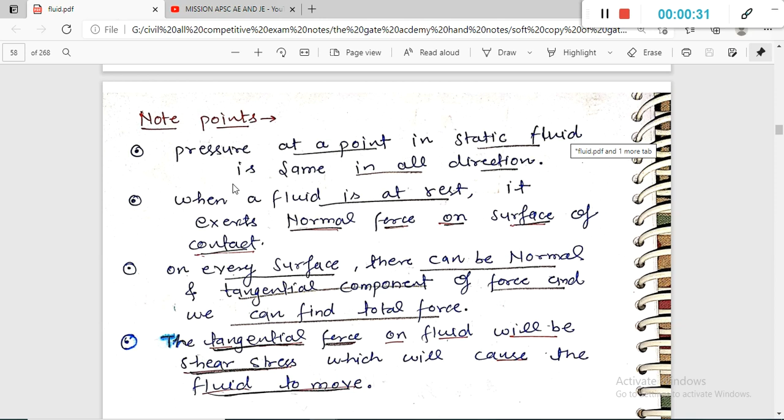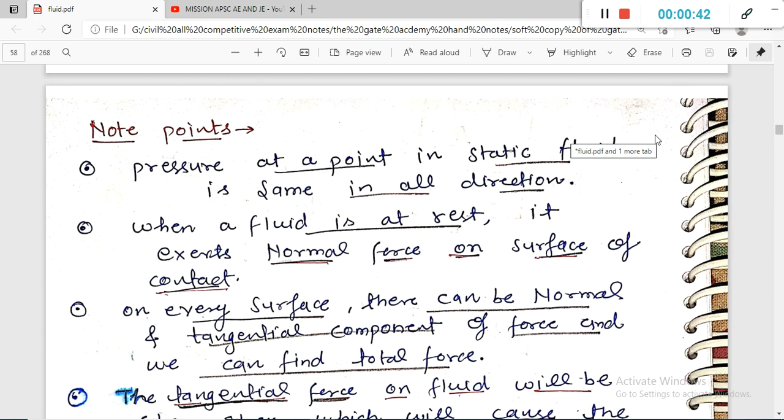Pressure at a point in a static fluid is same in all directions. This is basically Pascal's law. Pascal's law is a conclusion that at any point in a static fluid, the pressure is same in all directions.

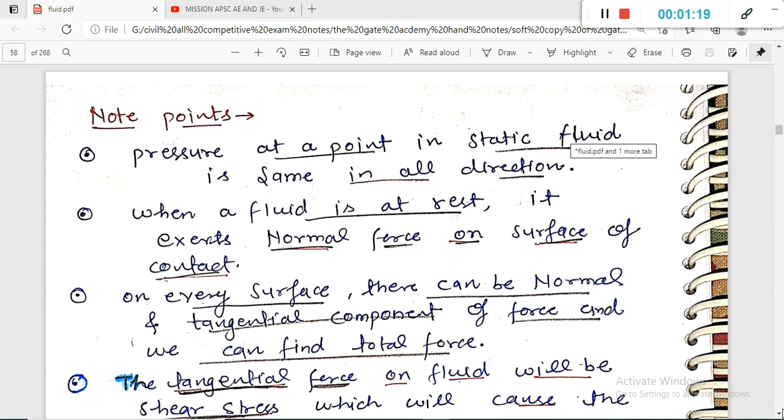Second, when a fluid is at rest, it exerts normal force on the surface of contact. When fluid is at rest, the pressure or normal force is always perpendicular to the surface. On every surface there can be normal and tangential components of force, and we can find the resultant force. Every surface will have a tangential component and a normal component, and from these two we can find the resultant force. Another important point is that the tangential force on the fluid will be shear stress which will cause the fluid to move.

So a moving fluid exerts both tangential and normal force, but for a static fluid, the force exerted on the surface will be normal to the surface. So if the fluid is moving, it gives tangential force and normal force, but in case of static fluid it only gives normal force to the surface.

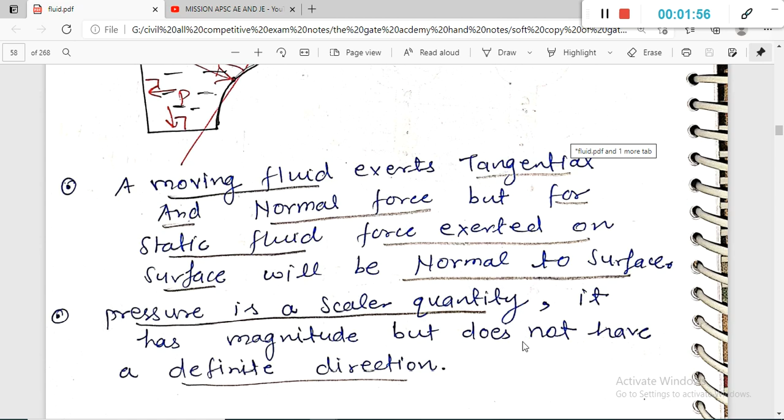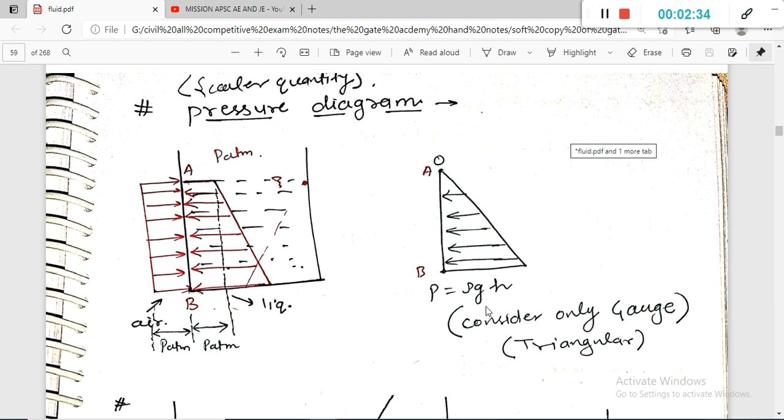We also know that pressure is basically a scalar quantity. It has magnitude but doesn't have a definite direction. So if you see the pressure diagrams - it is atmospheric pressure outside the container, and inside also atmospheric pressure is there. Because of the liquid we have linear variation. Since this is atmospheric pressure outside and inside too, the resultant is 0, that's why we can assume the pressure diagram as triangular. At the base it will be rho g h, and at the top it will be 0.

Now, how is pressure variation in the case of gas? Wherever we measure, pressure at every point in gas is the same. Suppose this is a container with three points A, B and C. So whatever pressure is at point A, it will be same at point B, same at point C, because we are plotting with respect to gas. In case of gas, pressure remains same everywhere inside the container.

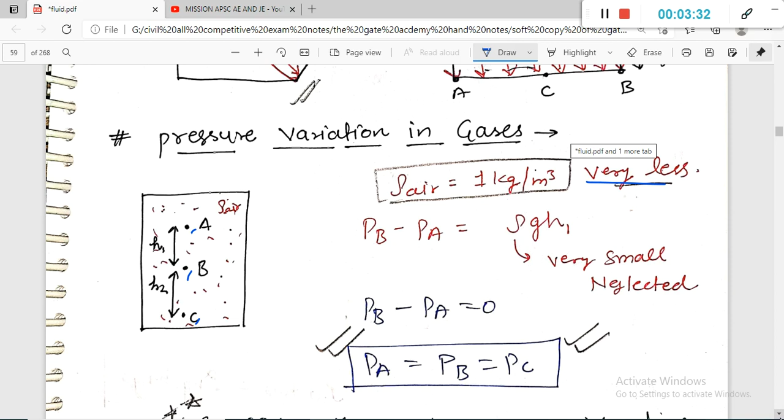The density of air is 1 kg per meter cube, which is much less compared to liquids. So if you see the difference Pb minus Pa equals rho g H1, but we know that density of air is very small. That's why we can neglect it and assume Pb minus Pa equals 0. That means Pa equals Pb equals Pc. So pressure variation is always taken as constant in case of gas. Try to remember - we can assume no pressure variation in case of air or gas.

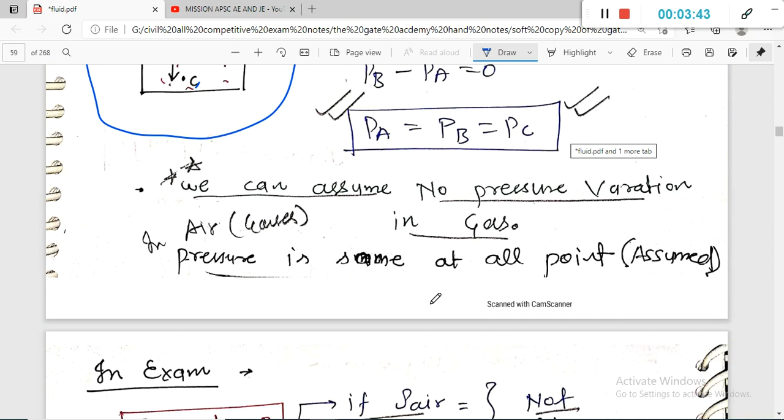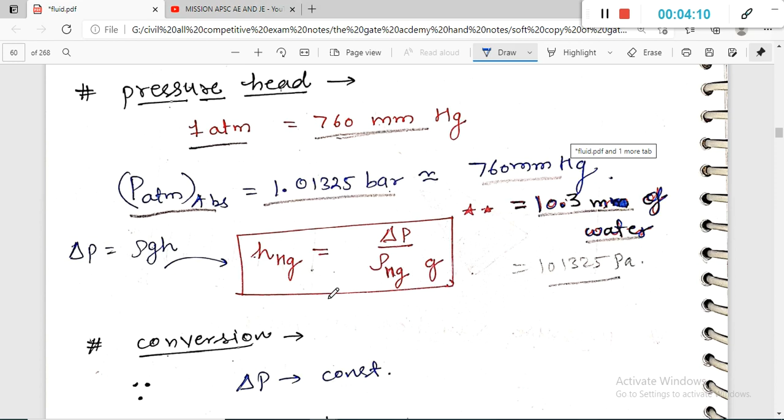Suppose here we have water, and here we have mercury. We know the pressure variation is del P equals rho g H. For water, rho W means density of water, G is gravity, and HW is the height of the water. Similarly if we take mercury, the pressure variation del P is constant, so it becomes rho Hg G H Hg, where rho Hg is the density of mercury and H Hg is the height of the mercury column. That's why we can equate both. If we equate both, we get rho W HW equals rho Hg H Hg.

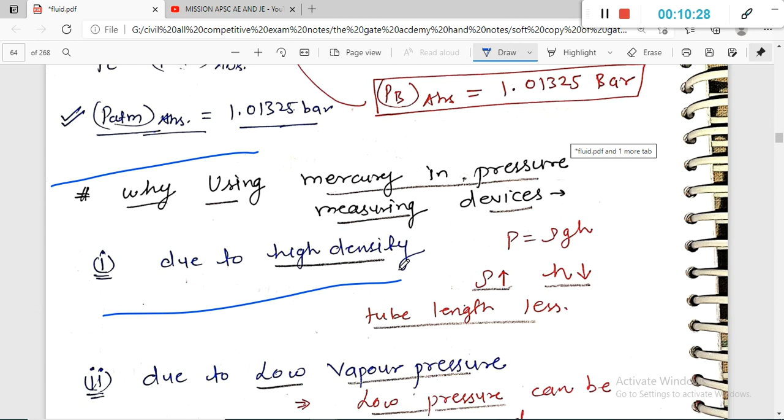If the rho value is high, we can provide less height, that means the tube length of our barometer becomes shorter, because rho g h pressure is multiple of rho g h, and rho is very high, that's why it will require less amount of h to maintain the pressure.

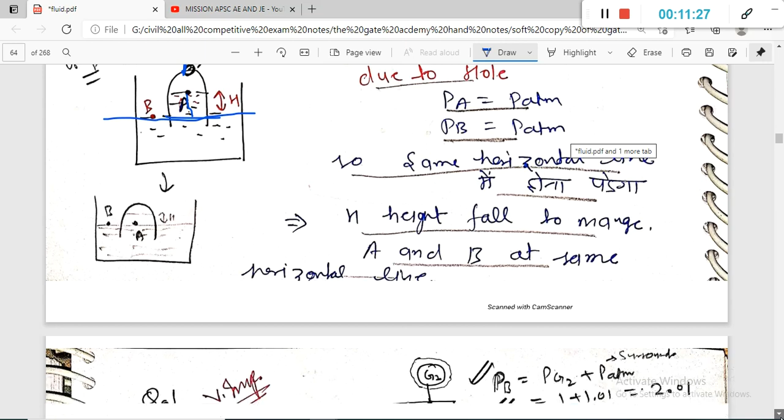So this is basically very important, then we'll move to other instruments like the piezometer. It is used to find pressure of fluid at any point with respect to atmosphere.

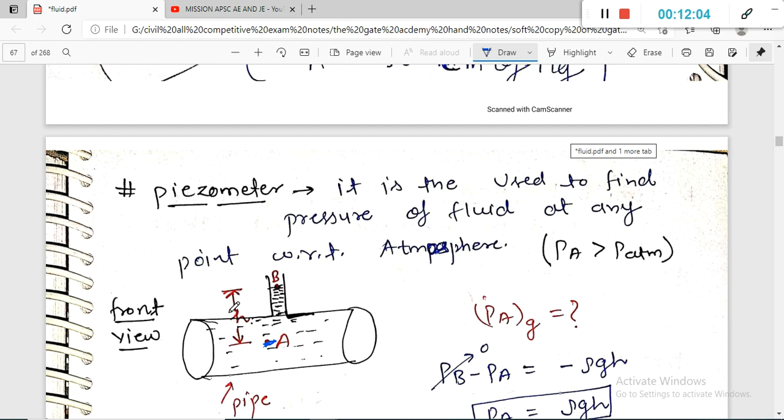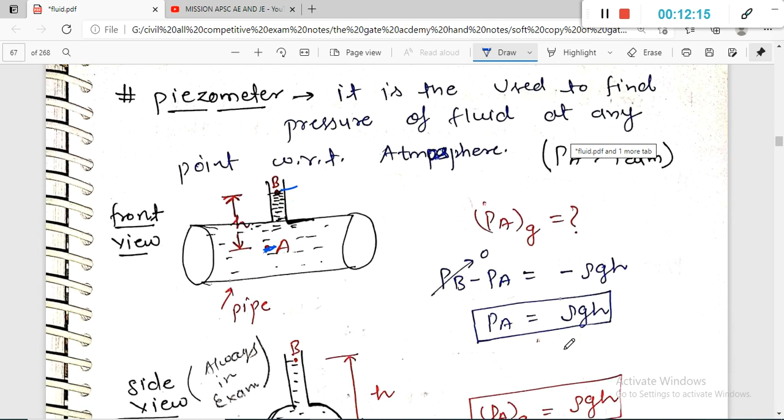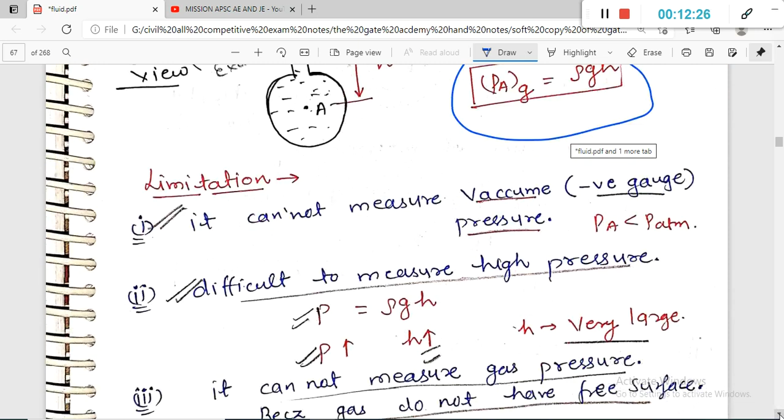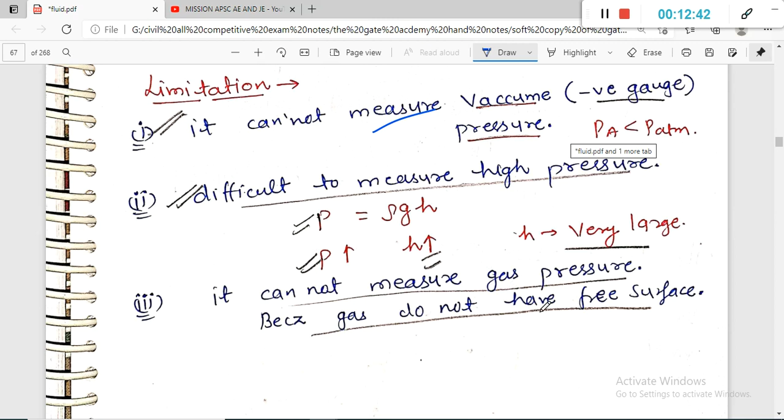What are the limitations of the piezometer? It cannot measure vacuum pressure, it is difficult to measure high pressure, and it cannot be used for gas pressure because gas does not have a free surface.

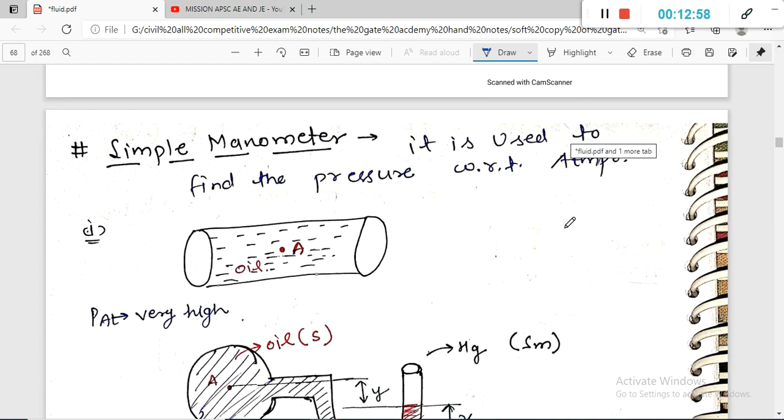To overcome these, we use other instruments like the simple manometer. It is used to find the pressure with respect to atmosphere. In the manometer, we use manometric tubes and manometric heights, with manometric fluid having specific gravity sm and density rho m. Here x is the deflection of the manometric fluid and p is the pressure.

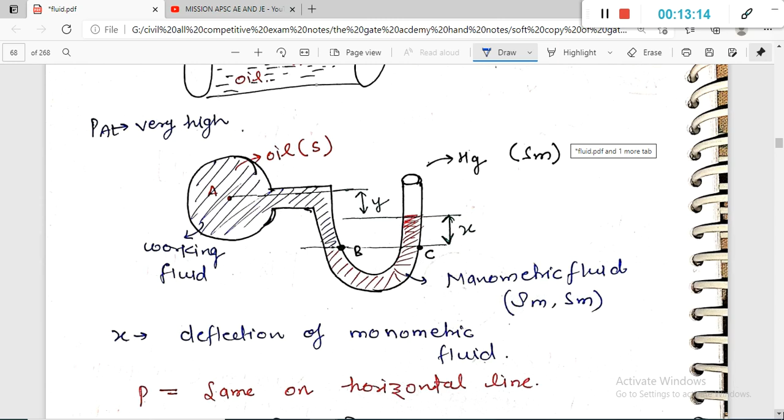From the equations: pressure at a plus rho g times (x plus y) is equal to pressure at c, since it's the same line pressure c equals pressure b, and pressure c is equal to 0 plus rho m g x, that means rho m g x is nothing but this part of the equation.

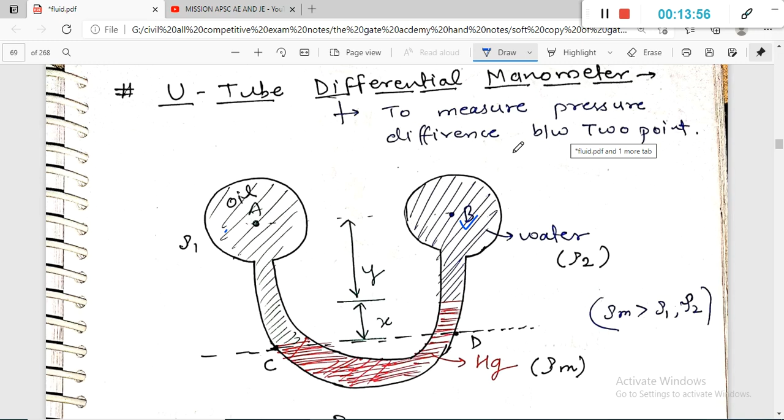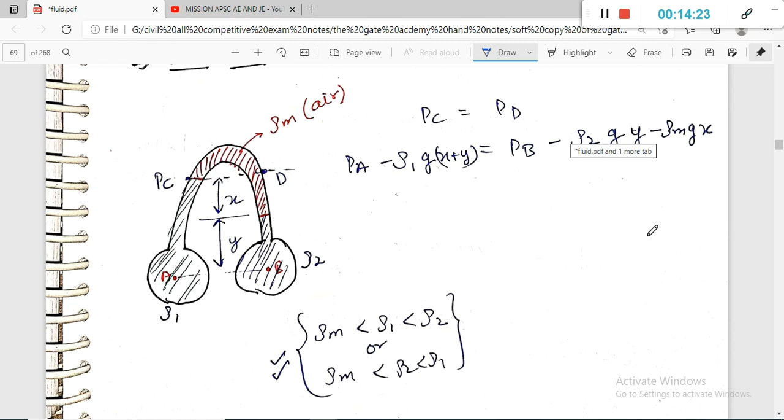For the inverted case it's the same, you just need to form the equation: pressure a minus rho1 g (x plus y) upward, negative, equals pressure d. Pressure c and pressure d are on the same horizontal line; pressure d is pb minus rho 2 g y minus rho m g x. This is how we measure it.

This was basically about pressure measuring instrument devices. In the next part we will move to the next part of fluid mechanics. Thank you.